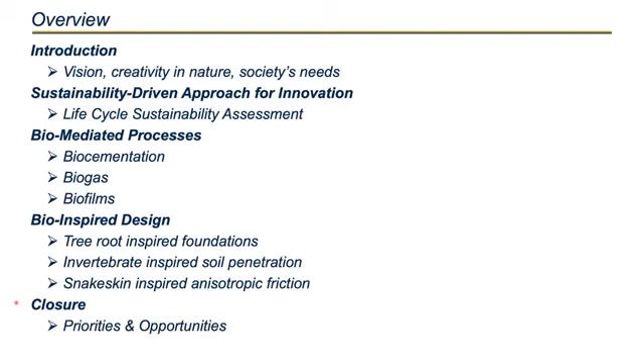So over the next 35 to 40 minutes, I want to walk through the following outline. I want to introduce the topic, the vision, as well as the needs and priorities for this. From that, build into a sustainability-driven approach that we are using to guide the research in this field, with one eye looking on the developments, the other eye looking forward. I'll talk about 3 bio-mediated processes, 3 bio-inspired processes, and then close with a summary and some opportunities and priorities as we move forward.

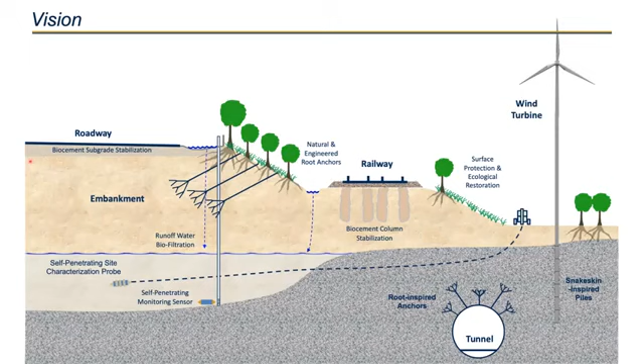So with that, let's get into the introduction, speaking on a couple different topics. First of all, long-term vision. You saw this cartoon that I had sketched up as part of the advertisement, and your takeaway is that there are a lot of systems or solutions here that we don't currently have, and they look a little bit different and unique.

And those attributes are driven by using either bio-mediated or bio-inspired processes. As a whole, the vision really is that the field of biogeotechnics is rooted in a hypothesis that if we study, understand, harness, translate, and apply both geotechnical and biological processes and ideas, we can stimulate innovation and generate new geotechnical technologies that can produce step changes with respect to our practice, and from there deliver advances with respect to sustainability, performance, safety, and ultimately societal well-being.

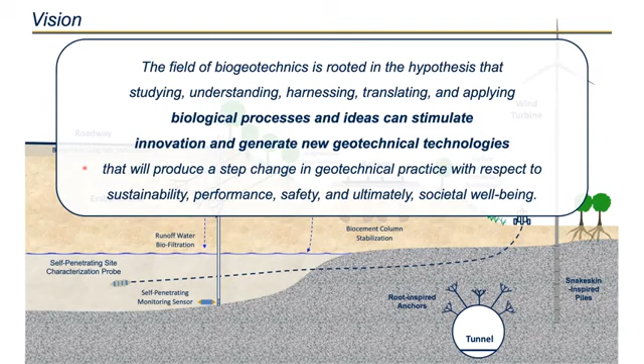Up front, I want to define and distinguish between these two different modes. The first being bio-mediated processes, which began roughly 20 years ago by a few of us around the world. This focuses on the initiation and regulation of natural biogeochemical mechanical processes to produce changes in soil engineering properties. More recently, in the last 5 to 10 years, the concept and process of bio-inspired design has come to the fore, and this is the abstraction and translation of natural biological solutions in terms of forms, behaviors, or principles, to develop new solutions to engineering challenges.

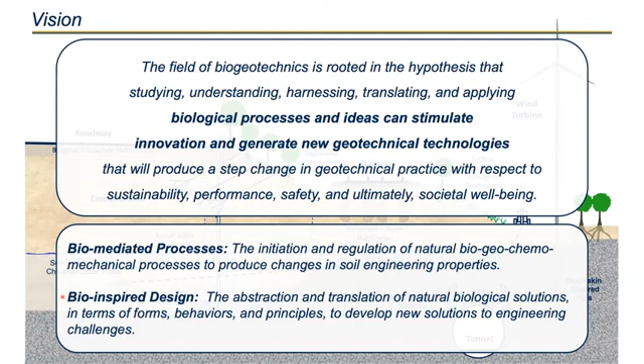So first, if we look around us, we see creativity in nature in many different places, and we realize that these different organisms and processes have been doing geotechnical engineering for a long time. They have different processes in which sensing and penetration have become very efficient. Tunneling has been occurring for an extensive period of time by different organisms.

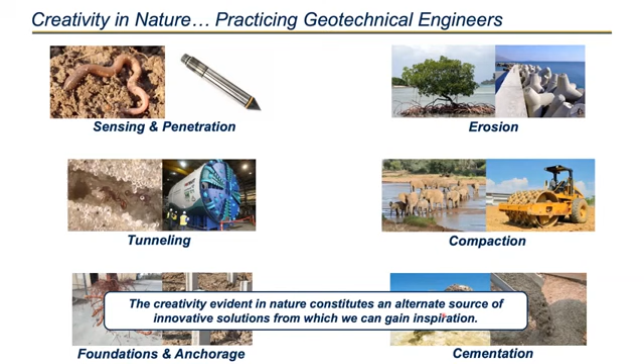So at a high level, I think we could argue that the creativity evident in nature can constitute an alternate source of innovative solutions from which we can gain inspiration and abstract different kinds of ideas. Let's look at this a little bit more closely.

First of all, looking at nature's solutions, we would see that nature's designs are ecosystem specific. We also have to remember or appreciate their objective, which is primarily survival and reproduction. The currency that they make decisions by is the materials available and the amount of energy they have to survive and grow. In almost all cases, they are multifunctional systems, serving more than one purpose for it to be a successful endeavor for an organism.

Built into that is the idea of the continuous reuse or cycling of the materials that are available and at hand. They can adapt to growth on demand, and with growth, they often can be self-healing.

If we lay this up side by side against geotechnical engineering, we see in some ways we're similar. We do project site-specific design. We're concerned about safety, but money also drives us, the capital cost in terms of our currency. Historically, we've had a lot of single functionality in our applications, but that's increasingly becoming more multifunctional. From a sustainability aspect, we largely do once-and-done type construction that is not necessarily adaptive, and certainly it's not self-healing.

So at a minimum, we have to appreciate that the solutions in nature have similar and even greater constraints in their designs than we have in geotechnical projects, and therefore we should be able to extract some insight from them. So creativity is the first takeaway.

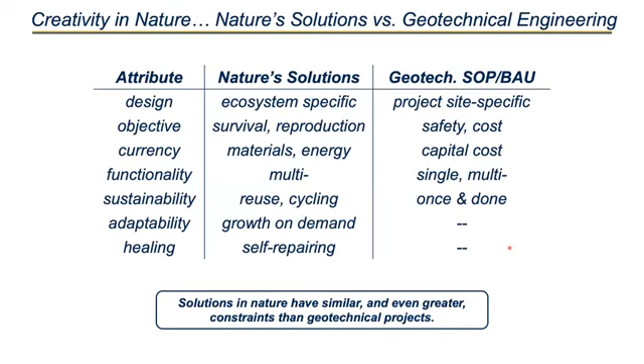Second, we need to think about the type of loading and magnitude of loading that we're continuously designing for now. In many cases, a variety of either rapid or very slow hazard events are dictating the designs for the geotechnical systems that we apply.

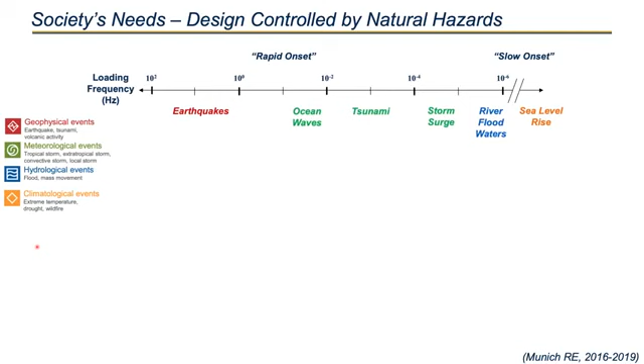Munich Re is a reinsurance company, and annually they plot worldwide the primary or largest natural disasters with the greatest consequences. Flipping through a couple years of these impacts in 2016, 2017, 2018, and 2019, we can see that the exact type of event or frequency differs, but in all cases, in the United States and around the world, these events are continuous, they're significant, and they're affecting our society. We have to consider these increasingly in design.

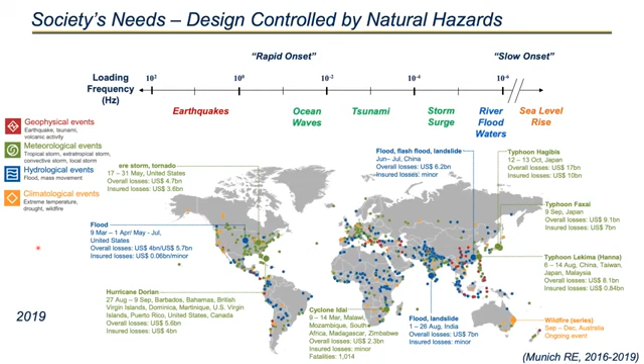And so we are really asked to be designing for higher and higher performance demands because the consequences are more severe. So the demand component of our design is increasing.

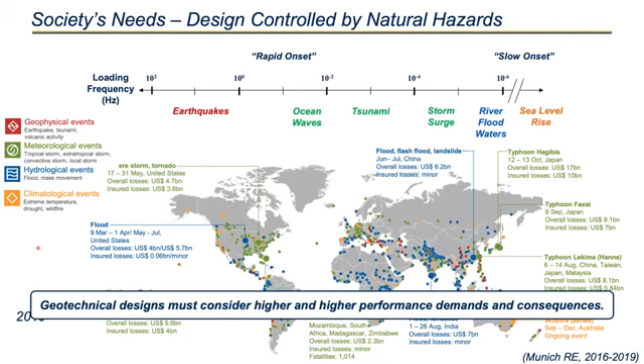This is somewhat challenging because we also have to look at how we're building and how construction is currently going on. The construction industry in combination constitutes about 75% of all raw material use, 55% of off-road fuel use, and the manufacturing and production of concrete, steel, and aluminum constitutes about 22% of greenhouse gas emissions.

So over the course of time, essentially post-World War, all the way up through today, aside from a few financial crises, we have been steadily increasing the amount of construction materials used at a non-sustainable rate. Further, as we have become more industrialized, the percent of renewables that we use has been declining steadily. So we have a challenge in this aspect as well.

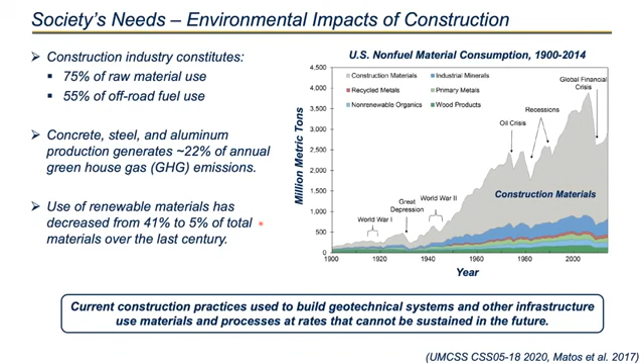Which leads to the third point, that we need to be building towards a sustainable future. If we look at the United Nations 2015 goals for sustainable development, they have outlined 17 different goals, which you can easily read online. I'll pass through these, and their descriptions make it clear that what we do as geotechnical engineers arguably have direct impacts on about half or more than half of these, and arguably secondary impacts on the rest. So we have a role to play in the decisions that we make and how we go about design and what type of solutions we use.

So geotechnical engineering has the opportunity to impact and contribute towards achieving several of these different sustainable development goals. The question then becomes, from the creativity of nature, from the increasing demands we have from engineering practice, from the fact that we cannot continue to construct things in the way that we have before, and for society's goal to move towards more sustainable living, we need a framework and a context within which we can be evaluating and guiding research and research development.

And this is where this sustainability-driven approach for biogeotechnics innovation came from. This is, as we call it within the center, the life cycle sustainability assessment framework. Let me outline what this constitutes and how this has been formed.

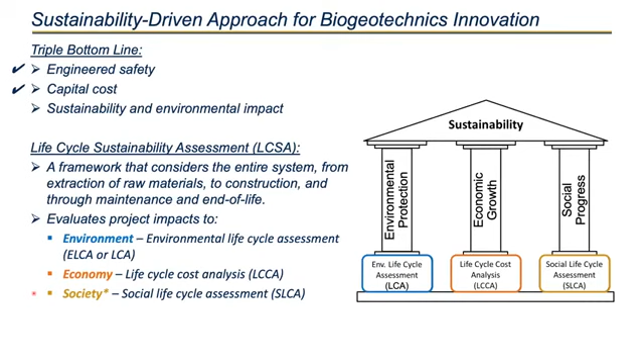The third one is the impacts to society, but those metrics and the quantitative robustness of that process is lacking relative to the other two. But nonetheless, we can use all three of these different tools.

If we apply this to different research projects, the intent or objective is that it provides and helps with balanced consideration of sustainability-oriented priorities. We can identify sustainability-related or driven research tasks. We can also compare the technologies we're developing against those used currently in industry, called business as usual technologies. And we can also evaluate, as that technology matures, its competitiveness with respect to cost, performance, and sustainability.

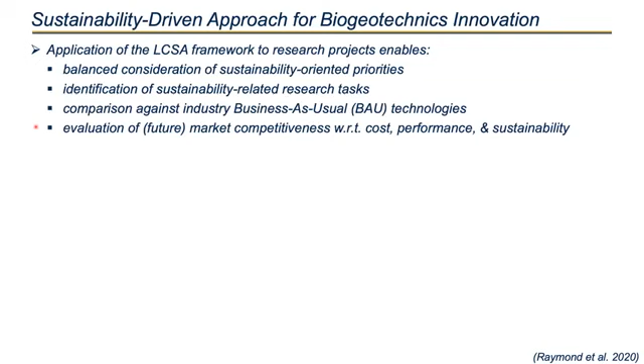So you can look at the entire spectrum of development from left to right, from a very small scale element tests where we're really proofing concepts, to upscaling and larger validation type tests, to field scale demonstrations, and ultimately to industry using this routinely in the future.

And throughout this entire process, we can perform life cycle sustainability assessments of the project, not once, but on some frequent basis, let's say annually. And when we do that and the project is relatively young, we can't do a full analysis, but we can certainly go in and look at the elements of materials and processes being used and get some early identification of hotspots of what could be costly, what is the feasibility.

And as we mature and these projects go to larger and larger scales, we can then start comparing it to existing business as usual technologies, and we can also be optimizing for field scale. And there's a component in here to develop tools for industry decision making.

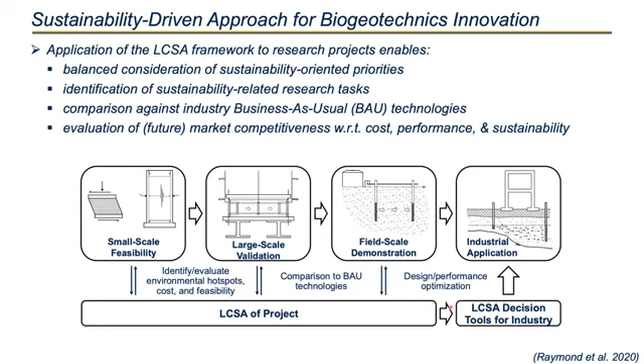Ideally, this LCSA approach would really trigger priorities and identify priorities early in the R&D to realize sustainability related benefits. And if we provide this feedback early and frequently throughout, we'll have an honest assessment of the potential of these different technologies. So I want to draw this out a little bit more with respect to two different frameworks.

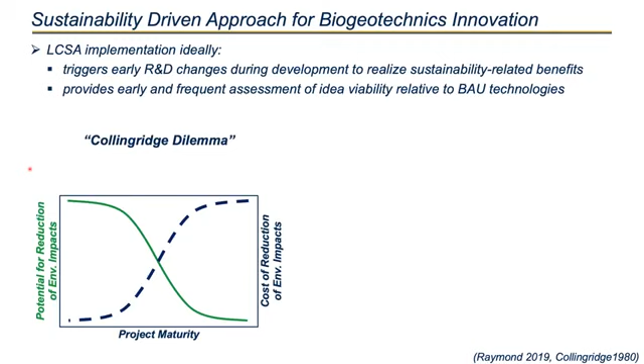The first is what's called the Collingridge dilemma, shown by the schematic. On the x-axis, you have the project maturity, going from very young to mature on the right-hand side. You have the potential to reduce impacts. Interestingly, when the project is in its infancy and you're just making early decisions about what constituents to use, what processes to use, you have high flexibility to change and make sustainability related decisions. As the project matures and you move from left to right, the technology becomes more locked in, you have less flexibility, and if you want to make change, it's going to come at a much more substantial cost.

So we need to be looking at this through the lens of sustainability throughout development.

The second part is the Gartner hype cycle, which is often used in technology development, where you have the initial idea generation, a peak of inflated expectations, you fall to the trough of disillusionment, you grow up the slope of enlightenment, and eventually you plateau and it's an accepted technology and practice. The intent and desire of LCSA implementation is that early on we're correcting ourselves, making a critical, early, honest assessment of what the technology can deliver. At the same time, that should shore us up from the trough of disillusionment, so that we are continuously reevaluating and not surprised as much. And eventually you can reach that plateau.

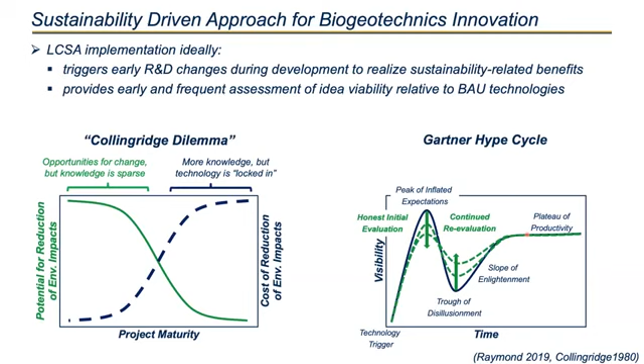So in the context of the priorities we have as society, and in the context of this framework, let's now move and look at some of these different technologies.

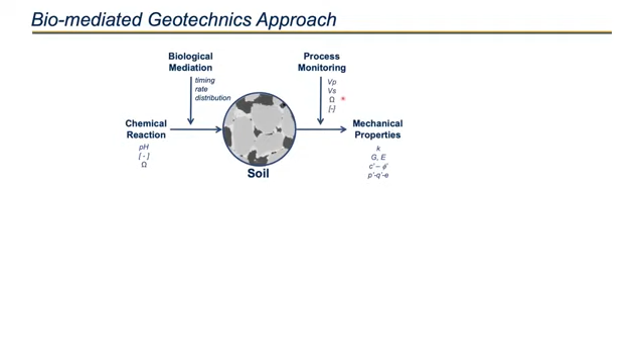Bio-mediated geotechnics: we're going to look at three approaches — biocementation, biogas, and biofilms. All three of these, as well as several others people are developing, are really based on chemical reactions occurring within the soil. We need a process or biology to mediate the timing, rate, and distribution for which these occur. If successful, we can realize improvements in the mechanical engineering properties — permeability, modulus, strength, and volume change. As this transformation takes place, we have to be able to monitor that process in real time, ideally, and geophysics is an excellent tool for this.

From there, we're moving to field applications, and there are many, and they are quite varied, as a lot of other people have shown. Through that, we have to deal with the upscaling to the field with respect to uniformity, permanence, and byproduct management.

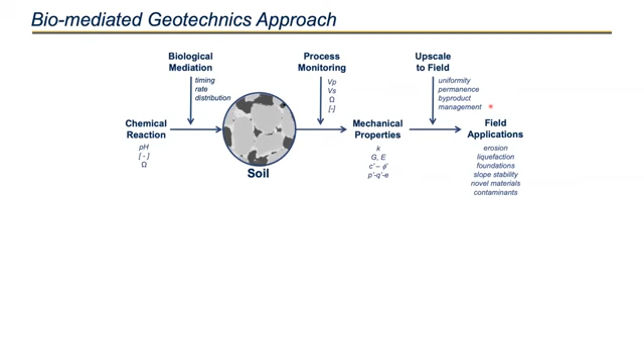To highlight a few attributes of this bio-mediated process: we're really trying to control and regulate biology and chemistry to accelerate or delay the processes. Process monitoring is key to track progress. The property changes can be substantial. We can achieve different levels of improvement that can be tuned to what is required for a particular site, so it is not a binary improvement — it can be applied very incrementally. We do have challenges with respect to upscaling, similar to a lot of the ground improvement technologies, and again the field applications can be wide ranging.

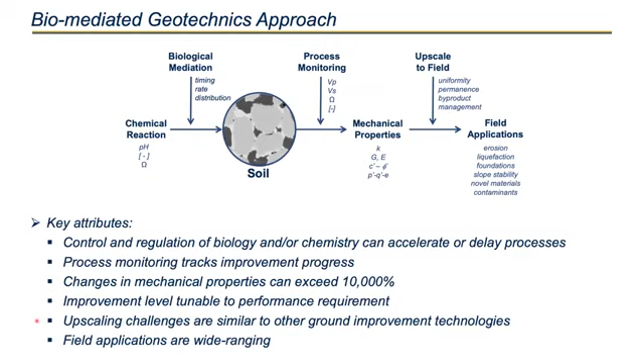So I'm first going to talk about biocementation and spend most of the time on this, in part because this is one of the technologies that has been researched the longest. Today we're collectively going to group together at least three-plus methods: microbially induced calcite precipitation, enzymatically induced calcite precipitation, and microbially induced desaturation and precipitation, in this part really focusing on the precipitation.

When we apply these technologies, all we're doing in the end is precipitating calcium carbonate amongst the soil particles. That can occur by ureolysis or by denitrification. That precipitation occurs preferentially at particle contacts, as you can see here, but you also have some coating on the particle surfaces as well.

This has three important attributes and contributions to behavior. The first is the binding of a cementitious material between the contacts. The second is your density is going up and your porosity or permeability is decreasing. The third is that your particle angularity and interparticle friction is also increased if you load the soil beyond its strength and you actually break those cementation bonds — that cemented material can still provide some contribution. So these processes have to be regulated, and we look towards microbiology to provide that regulation.

Again, microbiology provides the control of the timing, rate, and distribution of the precipitation. Early on, ourselves and almost everyone in the field would look at bioaugmentation as the way of treatment, where you would inject the bacteria. But through the research of others, as well as ourselves, we have realized and shown that biostimulation of native bacteria is entirely possible, and they eventually outcompete any bacteria that you inject.

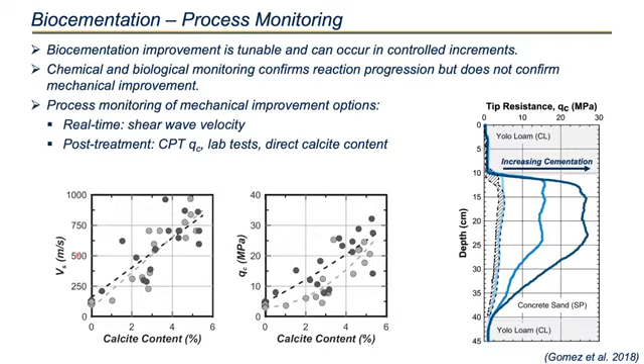Unconfined compression strength between 0 to 5 MPa. Peak friction angle increased up to 45 degrees. You can transform a contractive soil to one that is dilative. And the cyclic resistance for a given set of loading conditions, by adding 1% calcite, you can increase the CRR from 0.1 to 0.3, and the permeability can reduce quite a bit as well.

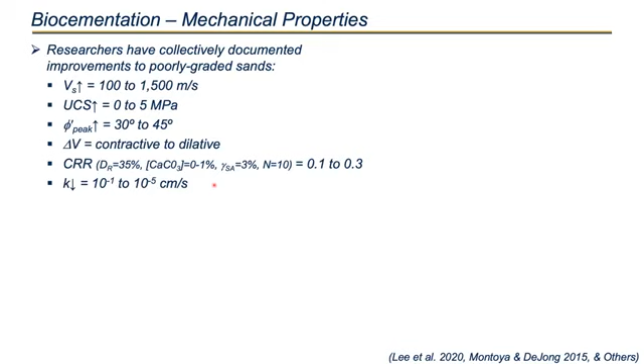From those element tests, we have to move to the field, which requires upscaling. In the process of upscaling, there are several priorities. Here are four of them: material efficiency, the treatment strategies, how we're going to monitor this process, and the byproducts that we might need to remove.

One example of this is a series of long horizontal columns that was performed, 3.5 meters in length, with various ports along the length to take aqueous samples for microbiology and chemical analysis, and shear wave velocity measurements along the length to track real-time the level of improvement.

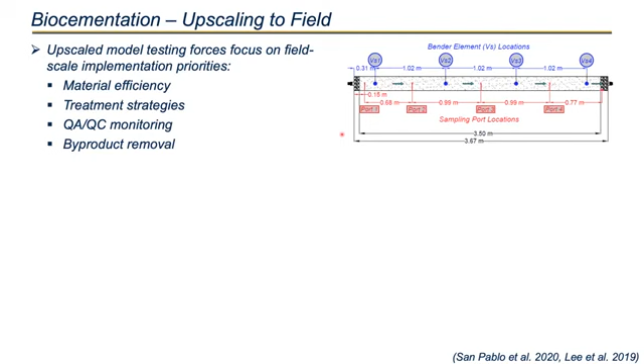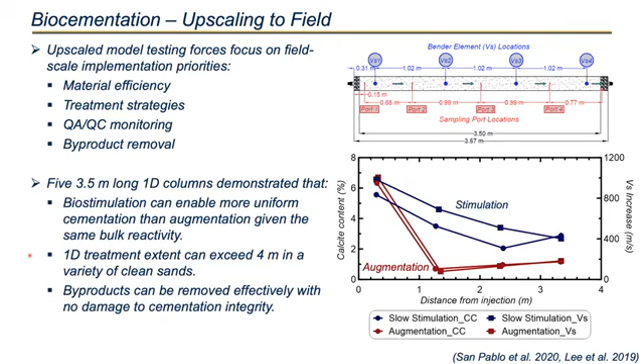Some of the conclusions were that biostimulation can enable more uniform cementation than augmentation for the same reactivity. 1D treatment can exceed 4 meters plus in relatively clean soils, and the byproducts are able to be removed as well.

The second part of upscaling is the mechanisms for failure and how we would design with these solutions in the field. One of the top questions, particularly in California, is the issue of liquefaction and liquefaction triggering.

We examined this through small model tests on the small centrifuge at the Center for Geotechnical Modeling, under level ground, saturated, loose sand conditions, using a variety of sensors to measure the process of cementation degradation and eventually liquefaction triggering.

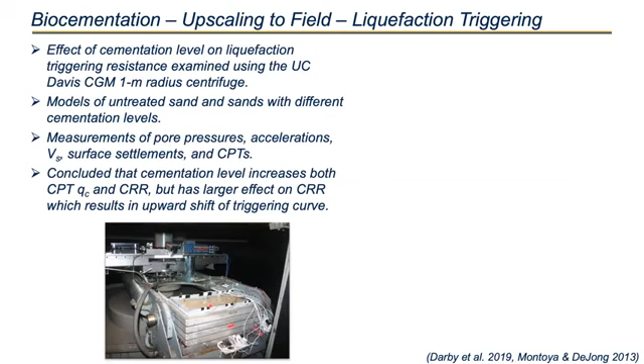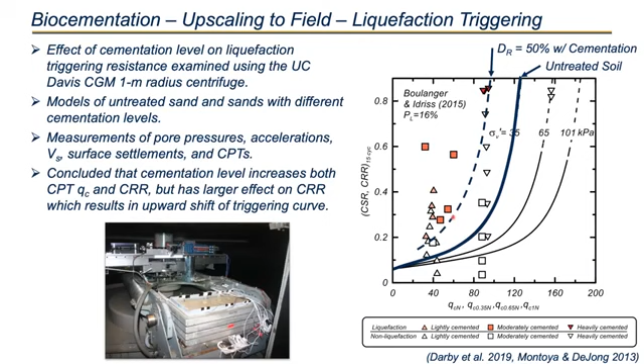As we move up through the field scale application, we have to still keep an eye on how our technology is improving compared to what's standard in industry. This was evaluated for an ideal level ground site with loose liquefiable materials down to about 10 meters depth, in collaboration with some industry partners.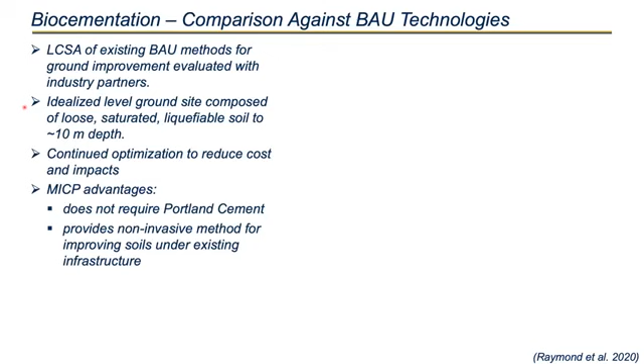The results showed improvements for a blow count up to about 22 from an initial blow count value of about 12 to 15. In terms of project costs in millions of dollars and primary energy, you can see these results and the ranges of results for dynamic compaction, vibro compaction, vibro replacement, compaction grouting, and deep soil mixing.

The whole objective, as you're advancing and improving your technology, is to go down towards the origin, reducing costs, and often that's correlated to the amount of energy used. For MICP, this technology has been advancing and we're continuously moving down in this space, but we're not done yet. Several different people working in this field have been identifying different ways to realize cost savings, and at the same time, realize reduced impacts by using different types of materials.

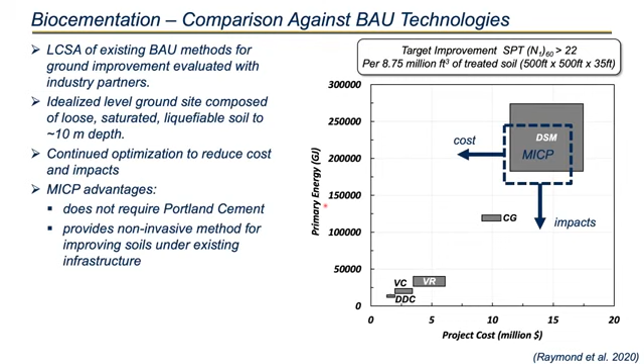So we have to keep an eye on this space and this domain at the same time while these technologies continue to mature.

Let's move to the second process, which is bio-mediated gas generation. This process is the generation of gas bubbles in the pore space, as you can see here, and the particle structure is largely unchanged.

It's been shown that stimulated microbes can generate this gas by denitrification, and these bubbles then decrease the degree of saturation and increase pore fluid compressibility, which is amenable to monitoring with compression waves.

It has substantial changes in mechanical engineering properties. One example is shown here for monotonic resistance, with mean effective stress on the x-axis and the deviator stress on the y-axis. If you treat the soil in a 100% untreated or saturated condition, you get the bottom line right here.

As you decrease the degree of saturation down to about 95%, you see the behavior and response change substantially. It's no longer collapsing, and it actually turns and begins to dilate up the failure envelope. In the cyclic space, the transformation is also substantial. Here is your cyclic resistance curve for 100% saturation, and as the degree of saturation decreases only by a few percent, you almost have a doubling of the resistance or capacity.

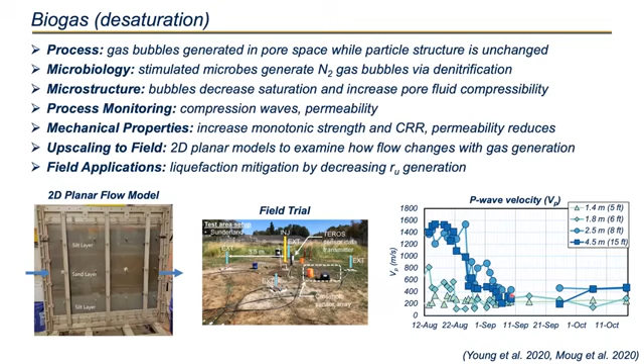This process also has been upscaled to the field, looking at 2D planar flow, where you have flow through a sand layer, and you can watch and model how the flow regime changes as gas bubbles are generated and redirect water flow. In application to the field, you can use P-wave velocity monitoring and see how initially saturated soils, over a period of about 20 to 30 days, decrease substantially to some very low value, confirming that the denitrification process is increasing pore fluid compressibility, which can then map to cyclic resistance.

The third technology we're going to talk about is biofilms. Biofilms is the process of formation of cells and polymers and solids that attach to particle surfaces, shown schematically here. Again, stimulated microbes can induce this process; we don't have to be injecting bacteria. This is an organic precipitate, which is reversible, so this is different from the other two in that when we stop treatment, this will return to ambient conditions, which could be useful during construction. They coat and bridge particles, as you can see below, and when that happens, you have substantial reductions in permeability.

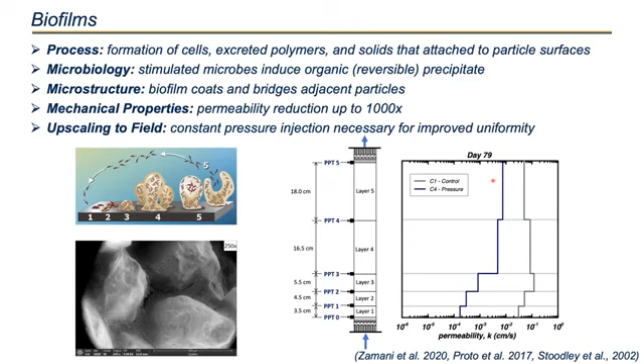So here's a long column experiment. The control column for this is the gray line to the right-hand side. You can see near the injection phase, the permeability reduction is 2 to 3 orders of magnitude, and as you get towards the tail end, the reduction is approaching 1 order of magnitude. This is one of the primary challenges for upscaling, how this technology can be applied and realized in the field in a more uniform manner.

Let's turn our attention to bio-inspired geotechnics for the balance of our time. I'll touch on the overall approach. Again, we're looking at biological systems that we're interested in, but very importantly, we're going to do that through the lens of the engineering knowledge that our discipline has.

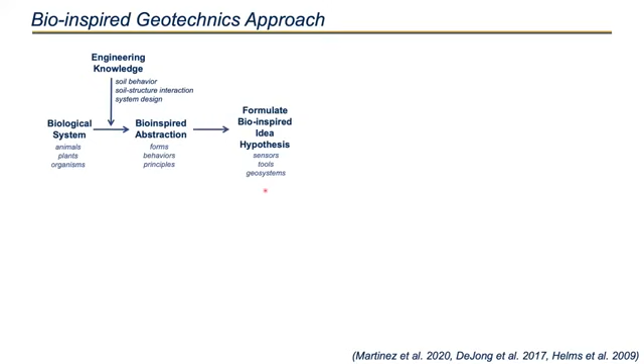We're going to leverage our soil behavior, soil-structure interaction, and system design. From there, we're going to abstract different forms, behaviors, or principles that we can use. We're going to formulate a hypothesis, and then test that hypothesis using a variety of techniques from the biology fields, from physics, as well as numerical simulations and experiments.

When we test that hypothesis, we could find it doesn't work, and we loop back and continue to iterate. We might find promise at the initial bench-scale experiments, and we begin to upscale this to the field. We might encounter challenges at that level once again, and loop back and retest this hypothesis. So this is an iterative process without a doubt.

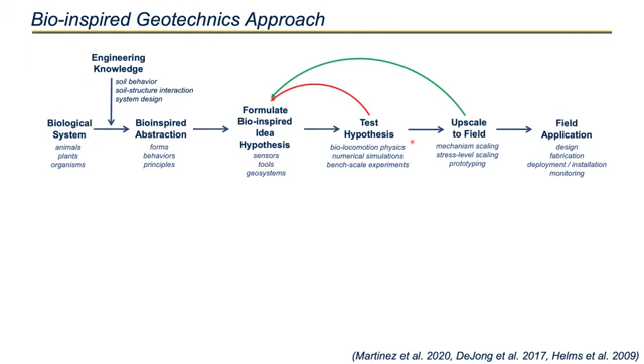Eventually we realize some type of field application with a new design, some way to fabricate a new deployment or installation, or some way to monitor. The key attributes are that inspiration is triggered by the study of biological systems through the lens of engineering knowledge. We can abstract the biological system, and that allows higher-order ideas to be extracted and studied. We do hypothesis testing, and we're challenged in upscaling across different stress and length scales, but we believe there can be substantial improvements relative to how we solve problems currently.

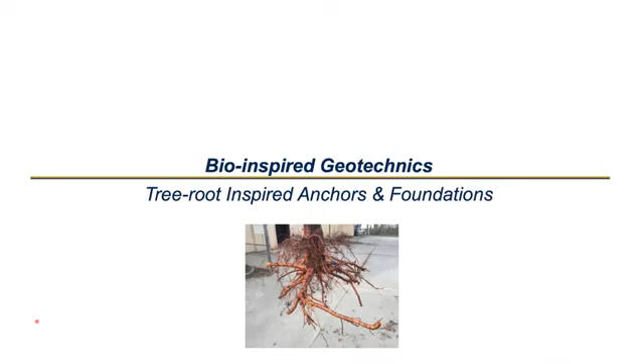So let's look at this through 3 examples. The first being tree root inspired anchors and foundation systems. The tree root systems that exist beneath plants and trees provide stability, nutrient, and water uptake. We can look at this through our knowledge of the deformation and capacity of foundation systems. The idea we're abstracting is looking at how the root architecture that governs these attributes performs under different combinations of horizontal, vertical, and moment loading. We believe that the nonlinear root attributes can enable a tunable foundation performance.

Here's an example of that. These are root stocks that were pulled from an orchard in a research project, and there's a whole host of different ones pulled. Here are 3 representative load displacement curves. You can see that the initial stiffness, the peak strength, and the rate of softening all differ, and this difference is dictated based on the root structure. This is being mapped to control or tune for different levels of initial stiffness, different maximum capacities, and different rates of softening.

A comparative analysis was performed for these different root systems against conventional foundation design, either on an equivalent mass basis or equivalent volume basis. If you compare the capacities of the trees in pull-out versus a micropile, that's a 10-fold performance improvement in benefit of the tree. If you do it with respect to shallow footings, that improvement goes up to about 50 times. So our takeaway here is there's plenty of room to improve if we deviate from our typical linear piles.

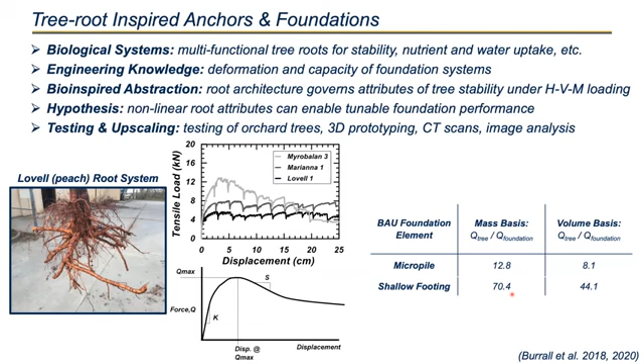This work is being upscaled through other people at the center. Here's an example of that: 3D printed models with 3 different branches at different angles.

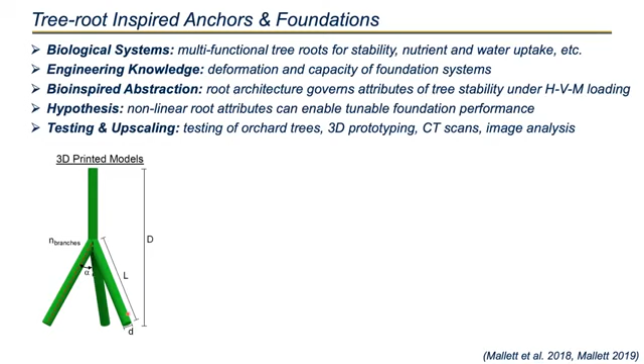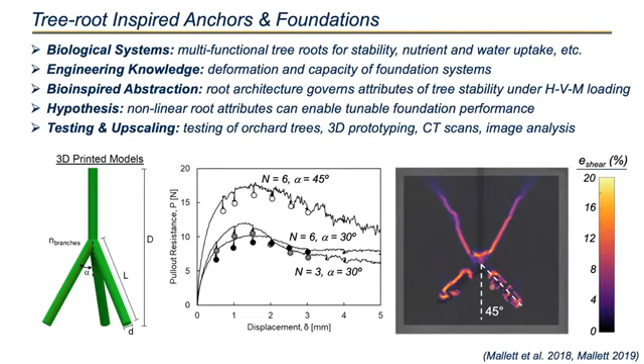Load pull-out tests were done for this. You can see that if you have the highest number of branches at the largest angles, you have a greater capacity, but also more softening compared to some other solutions. Using X-ray CT, you can go into sequences of X-ray images and really understand the failure mechanism, and how the spacing, length, and angle of these branches affect capacity.

The second technology we want to look at is invertebrate-inspired soil penetration. Here we're interested in earth and marine worms as well as clams. We examine this through our knowledge of penetration resistance and cavity expansion, looking in particular at the motion sequence and shapes of invertebrates during burrowing. This peristaltic motion provides simultaneously an anchorage force and decreased penetration resistance.

We believe this can result in self-penetrating sensors and probes. Here are some of the organisms on the left-hand side. The key part is that during this burrowing process, there's radial expansion at one section, which provides a reaction for the penetration of the tip moving forward. This is not too dissimilar from a cone penetrometer fixed ahead of a pressuremeter, an expansive type of device that can handle a reaction type of load.

You can do cavity expansion on this and compare it to cone penetration resistance, and also compare it to experimental data. We found for a variety of different soil types and conditions that the length of this anchor relative to the diameter of the penetrometer needs to be in the range of about 2 to 5 in order to provide sufficient reaction. What's interesting is that this number is in pretty good agreement with that of different clams that exist in a variety of places around the world, and you can see the length-to-diameter ratios for these clams.

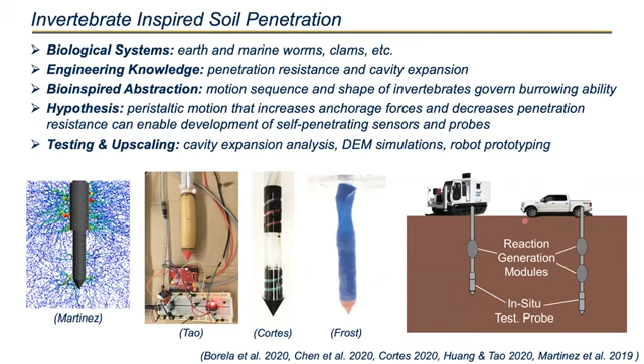So the clams are doing it—why can't we do it through some geotechnical innovation? That's what people are doing. Discrete element modeling is being used to model the expansion and the force networks generated both during expansion and during shear. You can also look at the tip resistance and whether there's coupling or interaction between those. There are 3 different groups within the center generating model-scaled, robot-type penetrometers that can self-burrow and self-advance. Ultimately, the vision is that you could have downhole reaction modules, and the requirement of a dead weight of 20 or 30 tons on the ground surface, transported to every site, can go away.

The last example for the day is snakeskin-inspired anisotropic friction for piles. Here the interest is looking at the underbelly of the snake, which you can see, and that's different from the scales on top. We look at this through our knowledge of soil-structure interface behavior. The abstraction is that the anisotropic shape of the scale enables biased load transfer: when the snake needs to react against the sand to move forward, it has a high frictional value, while at the same time the rest of the body sliding forward experiences much lower friction.

This has been defined in the biology literature as shearing in the cranial direction, against the scales, versus the caudal direction with the scales. The hypothesis is that this anisotropic soil-structure interface could, for example, reduce installation resistance and increase pull-out capacity.

Colleagues at UC Davis, Alejandro Martinez, have been looking at this with the interface shear device. Monotonically, this is not a surprise. You can see similar initial stiffnesses, but you get higher frictional resistance in the cranial direction, that is against the scales, than you have in the caudal direction.

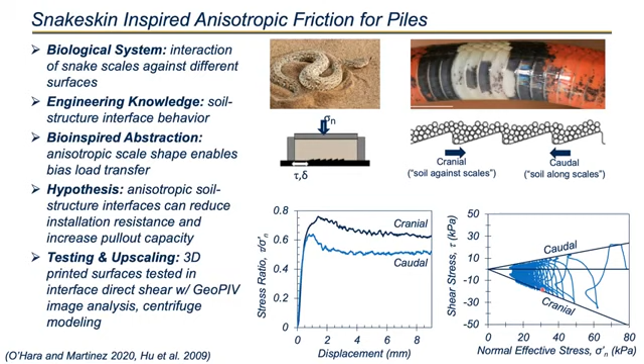What's fascinating is this process persists during cyclic loading. In the caudal direction, you'll get a smaller failure envelope than you can generate on the back cycle with the cranial. He's beginning to upscale this as well, with model piles of different diameters and lengths between these ribs or ridges of 6 millimeters, performed at the UC Davis centrifuge.

One monotonic testing example is that when you install in the cranial direction, you get a higher penetration resistance than in the caudal direction. But when you reverse, that is just the opposite. So if you wanted lower resistance during penetration and higher resistance during extraction, relatively speaking, you could achieve that.

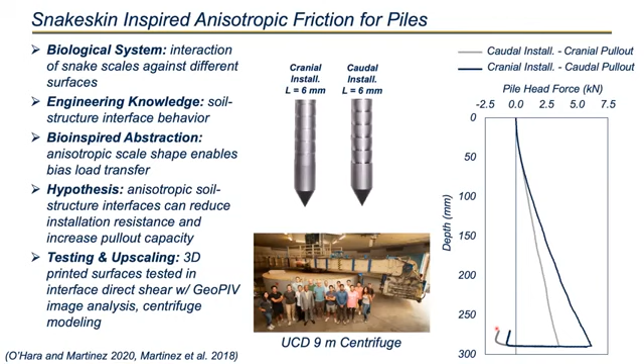So let's come to a close here. Our time is up. Just to summarize a few points: the creative solutions in nature are site-specific, efficient, multifunctional, and sustainable, and they can be a great source of inspiration for us.

The LCSA tool, or something like it, provides a framework where we can consider environmental indicators alongside our standards of performance and cost. They also help us compare against existing technologies.

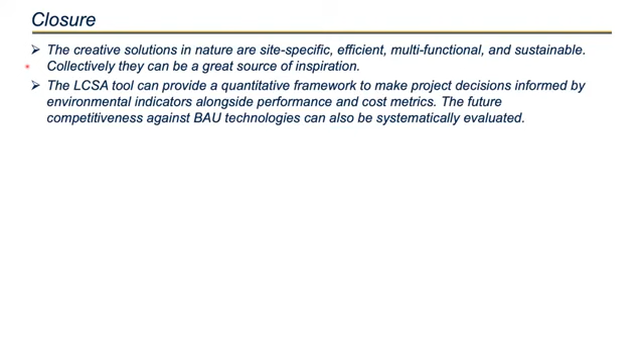Bio-mediated geotechnical solutions harness natural tunable processes that can produce anywhere between a 10 and 10,000% change in different soil properties. These are being deployed in the field, so it's not a question anymore of can we do this. We've shown that we can, and now it becomes a question of optimization and competitiveness.

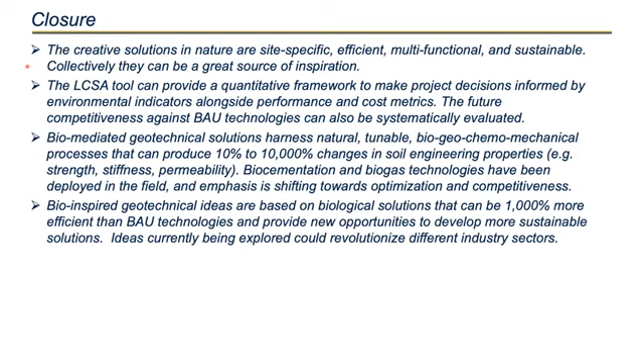Bio-inspired ideas are younger, but they can be quite a bit more efficient than what we do currently. There are new opportunities to develop new solutions, which we can't see yet or haven't developed fully, that could really revolutionize different industry sectors. So in summary, this field of biogeotechnics is still young.

We've only studied a small fraction of the different processes and ideas that are out there, and there's certainly more by a whole host of authors that I haven't had time to present here. It's probably likely that we haven't found the most important solution yet, so there's a lot to be discovered.

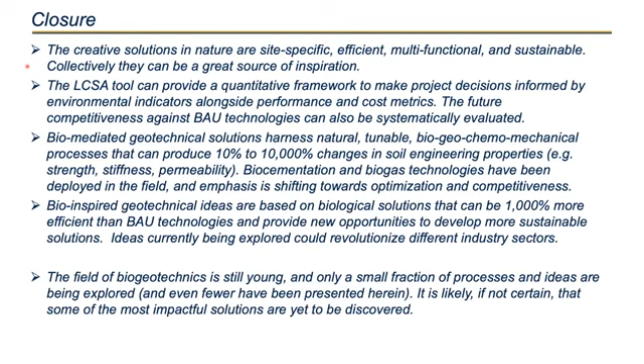Before I take questions, it's important that I acknowledge my colleagues, the other faculty members that I work with, as well as the graduate students and research team at the University of California, Davis. Certainly colleagues at other institutions that I've collaborated with over the years quite closely, the Center for Bio-mediated Geotechnics, led by Ed Kavazanjian at Arizona State, as well as Rosie Krajmalnik-Brown, David Frost at Georgia Tech, Paola Bandini at New Mexico State, and the whole crew of folks there.

This process and this journey began about 15 to 20 years ago with the organization of a few workshops in bio-mediated, and more recently a workshop in bio-inspired. Certainly the conversations and the collaborations and the network of people from those has been very important. And finally, the funding through the National Science Foundation for this work, particularly through Rick Fragaszy, and also Geosyntec Consultants has been a steady partner in this.

So with that, going to wrap up here, and I'm happy to take questions. Thank you very much.

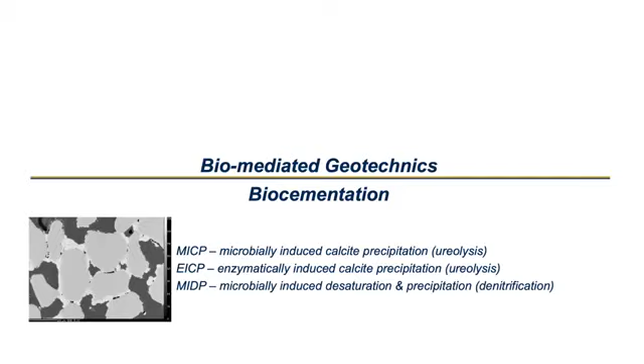For instance, friction and changes and cohesion changes. So what is the mechanism that makes this improve? At a particle scale, the improvement can be conceived or conceptualized by generating rigid cementation between particles, as you can see here.

So this can be realized in two different ways. This can be realized as the cementitious bond, which could increase the cohesive intercept. Brina Montoya and others have shown that that can be the case. At the same time, that can also be captured as an increase potentially in the peak friction of the material. You have different ways that you can, if you will, capture or decide to model that.

And that's also evident here. Depending on how you interpreted these results and plotted them up, you can see that the peak strength is going up substantially, as well as the stiffness. The critical state strength, or the constant volume strength later on, is changed less so.

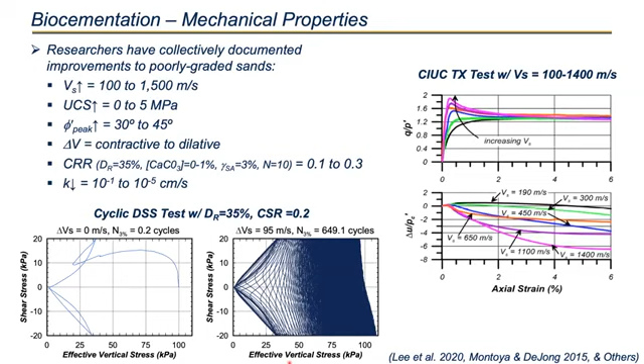So good. Here they were also asking, is there an effect of depth, that meaning pressure, on the effectiveness of the biogas soil improvement? Yes, for biogas, let me slide over to that.

The size of the bubbles will vary with the hydrostatic water pressure, and that obviously has to be in equilibrium. So as you go deeper, the size of the bubbles will be decreasing. This was observed in centrifuge modeling, and it's also been simulated in the laboratory. Some of the earlier work was Carlos Santamarina, and more recent work has been with Leon van Paassen and others at Arizona State University. So you have to be mindful of that when generating the gas in situ, and be realistic about what degree of saturation is achievable based on the overburden stress and the pressure that can be generated.

Let me see, I have a couple of questions. How exactly does the biostimulation of bacteria work? Does it involve modification of the environment or addition of nutrients? Briefly, can you go through that?

The general process of stimulating native bacteria is well known in the microbiology field, which I am not - I'm a geotechnical engineer, not a microbiologist. But the base knowledge for that is quite substantial. There are two options. One is you can provide a variety of different sources, including organic carbon and some oxygen, which can be generally favorable for bacteria growth. The catch is that not all bacteria that exist in the subsurface are amenable to either the denitrification process or the ureolysis process. As a result, a general stimulation approach can either take longer to take effect, or it might not be active in the end.

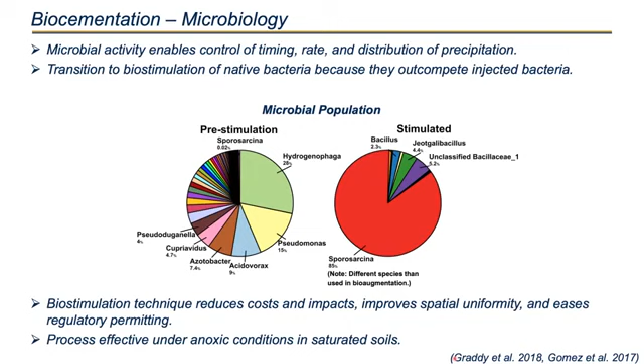There have been a variety of tests by ourselves and other researchers showing that if you sample soils from the field, you're able to stimulate native bacteria to do these processes. So that has been shown repeatedly - it's not a question of whether the bacteria is there, but rather the bacteria is there, it needs to be stimulated, then it can facilitate the process, and you can realize the cementation and desaturation you're interested in.

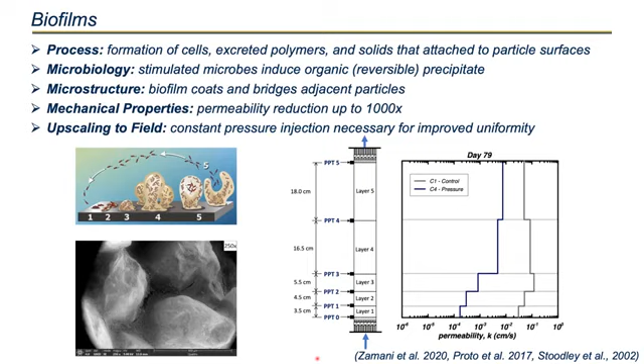For the biogas system, one of the attractions of N2 gas is it has a much slower dissolution than other gases in the ground.

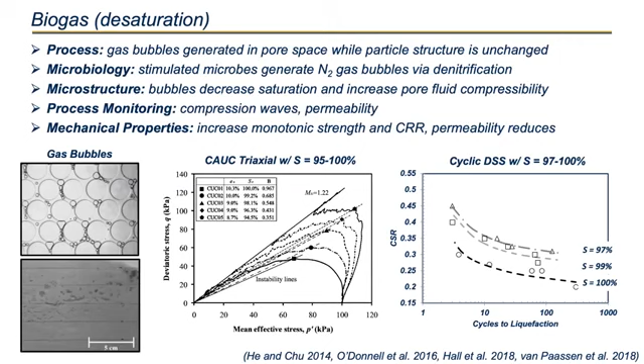There is research out of Japan and other places showing that those bubbles can last for decades. And when you go to the biocementation process, once the cementation is in place and formed, it becomes essentially a chemical permanence question. The bacteria and microbes don't have much of a role to play anymore. Now it comes down to the aqueous chemistry, and the base level pH. If you had a very low pH environment, you could have reversal of this process. But with neutral or high pH, particularly more alkaline conditions, that's favorable for long-term permanence.

So one last question before we really close here: what is the main factor limiting commercial application of these technologies at the moment, and how will this be solved?

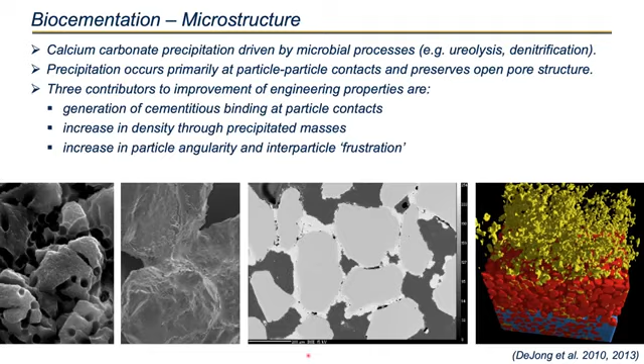That's a tough one. I would say for all of these technologies, one challenge we have is that as a practice, we are very slow to adopt new technologies. We are very hesitant. We talk with a lot of different groups and entities, and they're very happy to be second in line, not necessarily first. Some of these technologies are ready and waiting for engagement and partnering with industry to be implemented in the field. What comes along with that is developing QA/QC procedures, verifying treatment plans and methodologies for the field, and in some cases following through to ensure removal of byproducts as well.

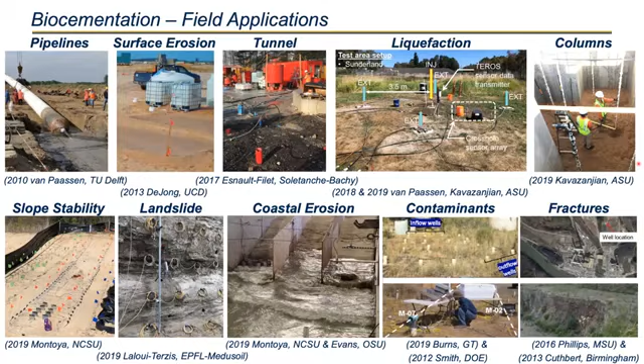Jason, do you have a little more time to stay around? Yeah, no problem. Let's see if I have a couple more questions that I've been collecting through several media here. For the bio-inspired topic, I have one: how do you go about finding biological models for geotechnical systems?

One is looking at it from a problem-based inquiry, and the other from a solution-based one. In a solution-based system, a biologist looks at something in nature and says, this organism, or this bird, can penetrate the water really fast with no trouble. That's interesting—let me abstract that form and process, and now go looking for a solution for it. Then they talk with other engineers and find, would this work for you? Would this work for you? There's a kind of matching process that goes on.

The inverse is someone on the geotechnical side who has a problem or a specialty area. They need to go backwards and start digging through biology to find matching solutions. This brings up two important parts: it requires interdisciplinary work, where a biologist who understands the phenomenological processes in natural systems talks with geotechnical engineers who have problems. So that's the general process—it takes teamwork, an interdisciplinary group of people working at it. The Helms reference is a good one to study in detail.

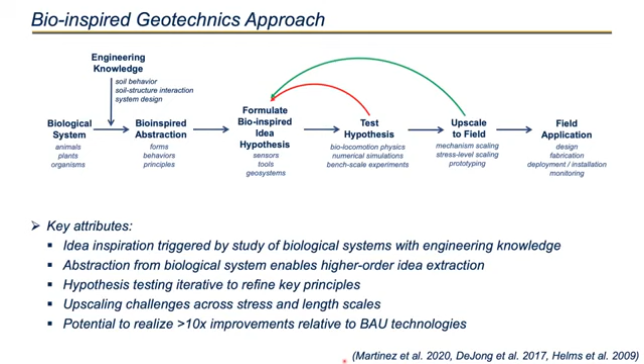That's absolutely correct, and that cannot be presumed to be possible or be presumed to be the case. I think this is a good example where we can combine what we've observed in biology with some of the analysis tools that we already have to test the feasibility, to test the hypothesis. We could go into the biology field and add to the conversation that biologists are having about how this mechanism works. The processes of cone penetration resistance to soil is something we have pretty reasonable solutions for as a community, and similarly the cavity expansion solutions, for a pressure meter, we also have reasonable solutions for that we could share.

So we can, as engineers, go into the worm biologist world or the clam world and bring the mechanics understanding that we have, and be able to explain why these natural systems work. At the same time, we also know that the cavity expansion and cone penetration solutions have been shown to work for the conventional work we do at greater depth. So we can run an analysis to determine its feasibility, and this is a good example of where that is true and can be true. There are other processes and mechanisms out there which would have some limitations, particularly with respect to stress levels and stress scaling as material properties change.